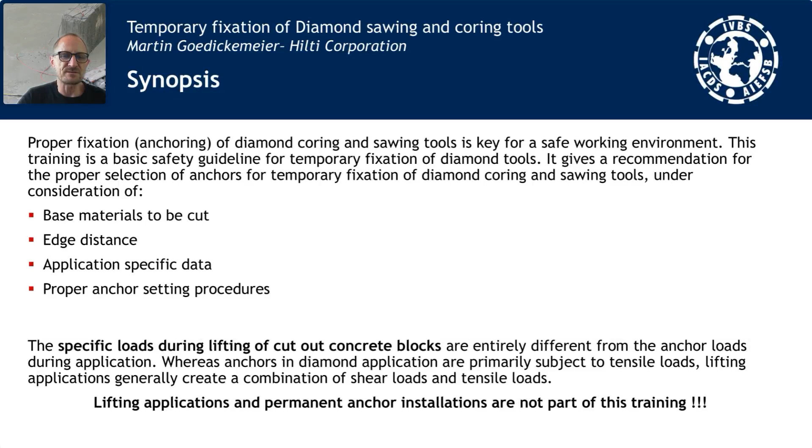Now, when we look into the applications, first of all we have to talk about the surface, the base material we are anchoring to. Usually our knowledge on the base material, on the concrete or whatever we believe it is, is relatively poor. We don't often know about the type, the tensile strength, and the conditions of the concrete, and it varies very, very strongly by the application.

The use of an anchor type which covers a wide range of these concrete types is therefore advised. It makes sense to have something which can be used more universally if already the base material we are facing is poorly defined. When we look into temporary fixation on masonry, lean concrete, or other surface materials which are not exactly concrete, we would of course have to use different anchor types, but we'll touch upon that later.

What is ultimately influencing very much what we do on the anchoring side are the conditions of the inserts. So if the core bit, saw blade, or wire is really blunt, we see that the forces which we have to exert increase significantly. Everybody knows how coring works - when you have to press the handle on the core rig really, really hard, you know that the core bit might be very blunt. The effect is that the forces acting on our equipment when we use blunt blades, wire, or core bits is factors higher, not just some percent - it's really 2 to 3 times higher, and of course we have to consider this as well when we are anchoring. We have to consider how and what quality our material actually is.

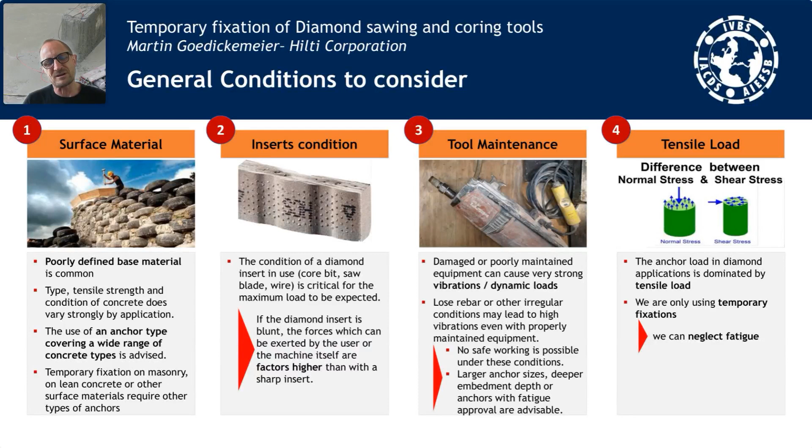The loads we are talking about today are normal loads, so loads which are in the direction of the anchor. When we look into different applications like lifting out blocks, we usually talk about shear stresses, which requires an entirely different look at the whole thing. Today, we are actually happy to be able to cover all the mathematics with normal loads in direction of the anchor, which makes the math - probably already a bit complicated - actually much easier to understand.

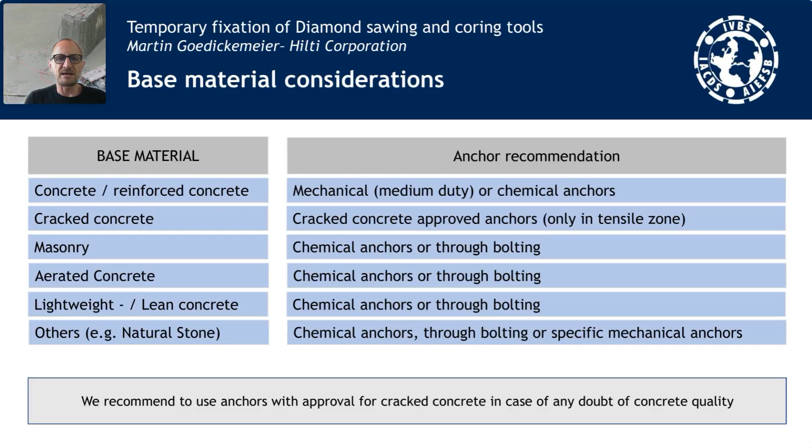Now we look at the base materials, very quickly going through that. For concrete or reinforced concrete, we would use mechanical medium duty or chemical anchors. On cracked concrete, we should use anchors which have approval or resistance for cracked concrete in the tensile zone. On masonry, we would have to use chemical anchors or through bolting. Aerated concrete, lightweight concrete, and natural stone go in the same direction, so there we cannot recommend mechanical anchors - chemical anchors or through bolting have to be used to ensure safe operation of tools.

When we look into cracked concrete, you've probably been asking yourself what that is - you can see it in the picture very nicely. Concrete can only compensate for compressive stresses. When you press on the concrete, that stress is tolerated very nicely. When you pull on the concrete, this does not work. So under tensile loads, which you see in the middle of the hanging beams or above the columns, the concrete will crack. Whether there's rebar or not, concrete will crack in these zones.

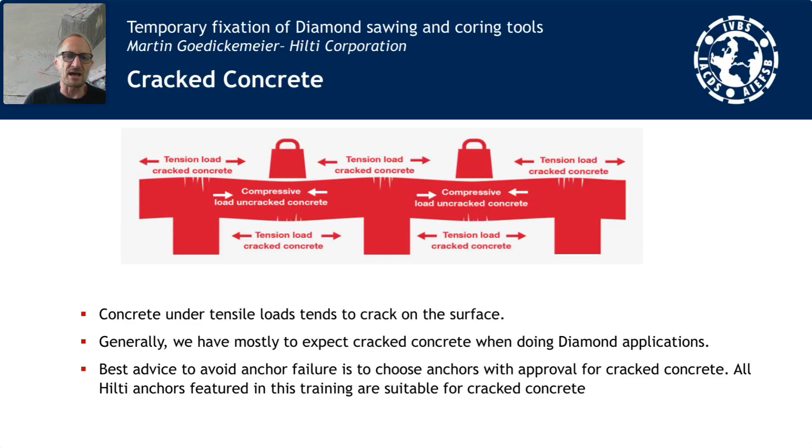And in these zones, we should consider using anchors which can tolerate cracked concrete. The best advice to avoid anchor failures due to concrete conditions is to choose anchors with an approval for cracked concrete, which all of our anchors have. We will show you which anchor types would actually be best for these conditions.

Now, when we look into the mathematics a little bit for the first time, we can do two things. I have put the math behind everything in the third box from the left, but in this presentation I will not go into details - I will just tell you basically three things.

One thing is, the diamond should be sharp. How can you judge it? If you take a core bit, hold it to the light and turn it a little bit, you see the reflection jumping on the diamonds at a given moment - that means the different facets of the diamond are reflecting the light as you turn it. When you have a blunt bit, the reflection changes gradually and you can clearly see the diamonds are round. What is good for us is a sharp core bit, a sharp saw blade, a sharp wire. What is bad for us is a blunt core bit, wire, or blade.

Why is that? When you look at the math, you can see that if the sharpness of the material goes down, the forces we have to exert on the core bit or blades to advance are higher - and not just a little bit higher. They are easily a factor of 2 to 3 higher, and that is clearly reflected entirely on the anchor. So the anchor will be loaded much more with a blunt bit than with a sharp bit. The only recommendation we can give you is: keep your insert sharp. Select the proper specification, select the right gear to saw or core with, and use a good quality machine. We have all experienced that blunt bits need very high pressure, and that can pull your anchor at the moment you really can't have this.

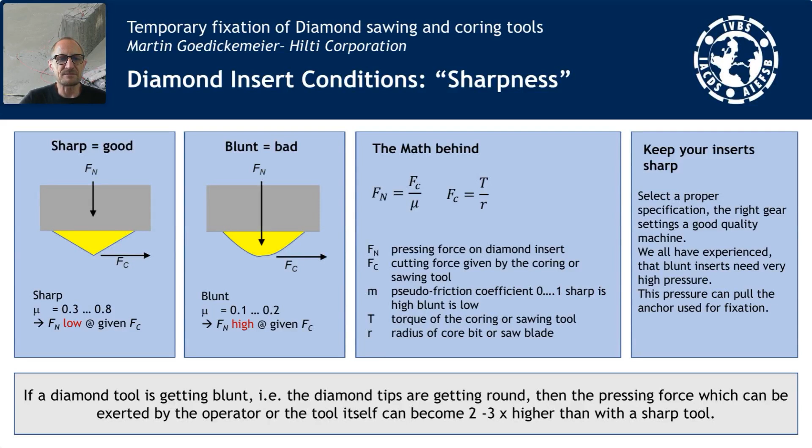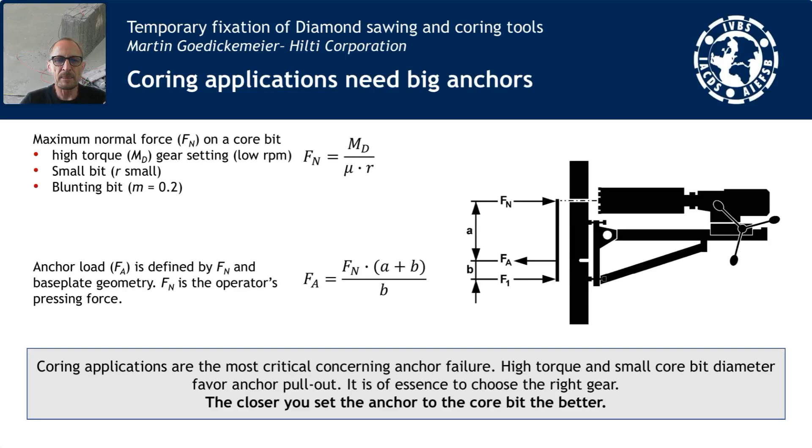Now, one more thing affecting the safety we have is the position of the anchor versus the rig - given by the difference between distances A and B in the picture. If distance B is very short and distance A is very high, then we have an extremely higher load, a lever factor, which pulls on the anchor much more than we believe. So what we should do in any case is put the anchor on a core rig, on a rail support for sawing, and on the pulleys for wire sawing, as close to the insert as possible - as close to the core bit, the saw blade, the wire as we can - because that will limit our pulling forces a lot. How much that can limit our pulling forces, I can show you on the next slides.

This one is clearly an application which is very bad - a very long A to a short B.

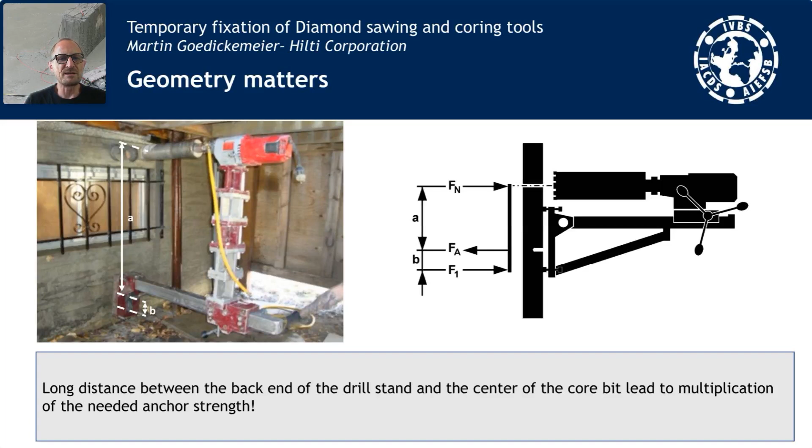Clearly to understand that pulling here on the core rig actually can pull the anchor in a very easy way. Now, when we look at the...

Given a core rig, you can see that if you have an anchor positioned somewhere in the middle of a core rig, now here you have the HD30 from my company, you can see that for small core bits, almost everything is in the red zone. The red zone would actually indicate that the anchor which you mostly use, an M12 anchor or a half-inch anchor, which most of my customers use for coring applications, is actually overloaded. Even if you used correct gear on a 52 millimeter or 2-inch core bit, the anchor is already overloaded.

When we go to a 4-inch or 102 millimeter core bit, you see that if we are operating in the fastest turning gears, we're still okay. But if we choose a gear which is a little bit high, we come immediately into the red zone. And probably for many of us, surprising is that on a 202 millimeter core bit, we almost never can reach the red area. So there, where we believe we could use a small anchor, we cannot. That means on the small core bits, there, where we believe we would have to use a big anchor, on the big core bits, we actually could use a small anchor. So that is very, very important for me that you memorize.

When you have an application with a small anchor, then you cannot use that for small core bits. You can use small anchors only for large core bits, but we clearly do not recommend that. We recommend that for any heavy coring application, like with the DD350 or any tool which is 3 kilowatt and more, you use an anchor which is a size bigger, an M16 or a 5/8 anchor, because those anchors give you the additional safety which you need to have really safe operation. So memorize, small core bits means actually big anchors in any case, whatever tool you use.

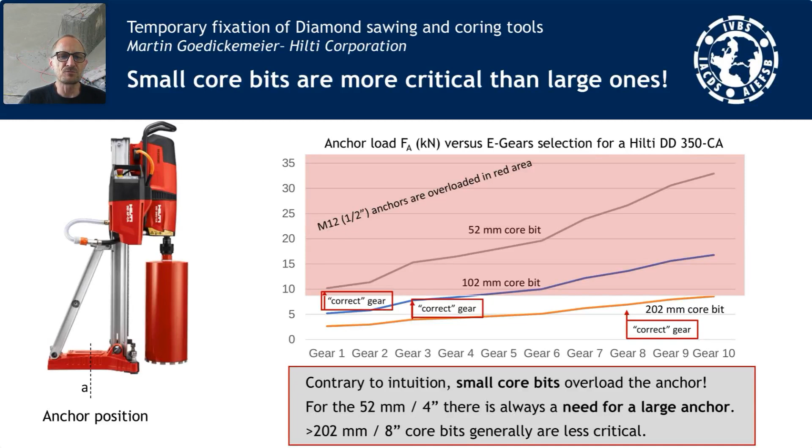When you're using rail support, like for the hydrostress saws, where you're extending downwards and where you have the fixation actually at the wrong side of the blade, then you should actually probably consider taking bigger anchors than you do today to have additional safety.

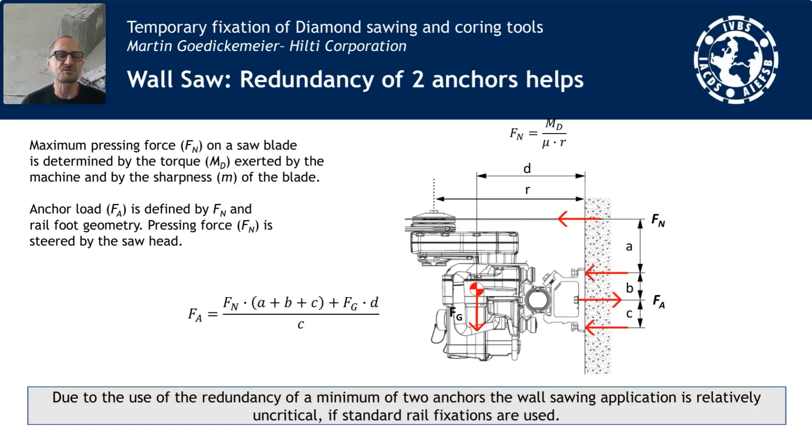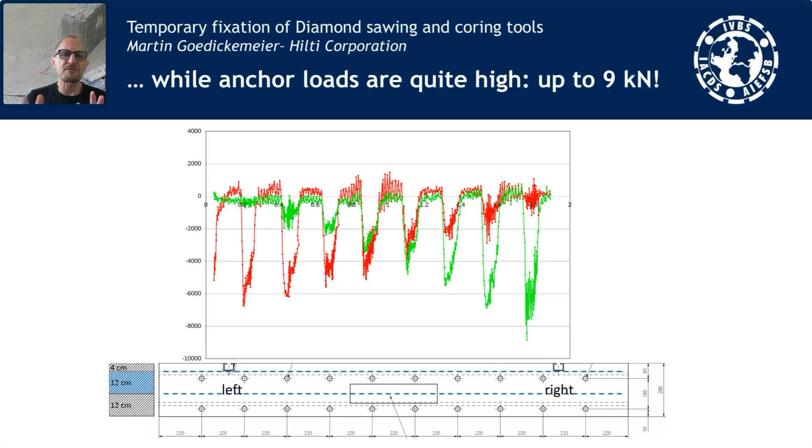When we look at how high the loads are on a sawing application, you see here depicted on the bottom actually a rail with a left fixation point, which is represented by the red loads, and a right fixation point, which is represented by the green loads. And you can see here that the highest load we actually are seeing when we are at the rail support, and the loads are in an order of up to 9 kilonewton, which is exactly what a half-inch anchor still can tolerate. So we are also at a sawing application at the limit, while the good thing is that we have actually 2 anchors in place, which gives us some additional safety and redundancy.

When we look into wire sawing, then we can clearly say that in this application, dynamic forces are governing. The static pulling forces of the wire on the wire is very low. It's only in the order of 1 to 2 kilonewton, so really low forces. But these forces, if something goes wrong, they are actually relieved if the wire ruptures when it blocks, or they are released when the wire doesn't rupture and the concrete block is indeed squeezing the wire. Then they are relieved by anchor breakage.

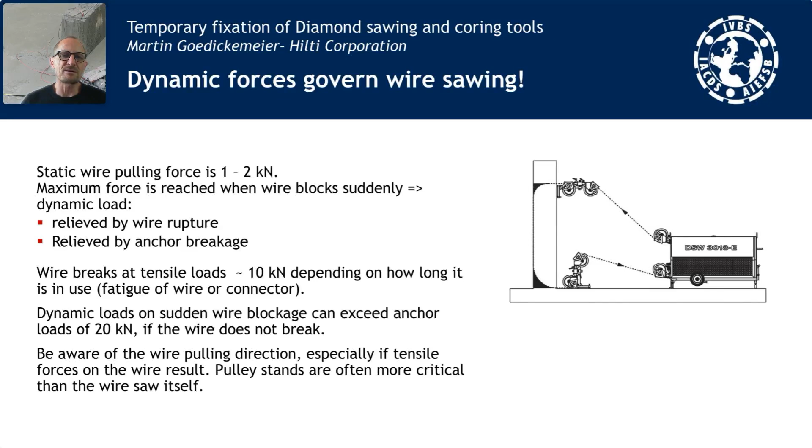We have seen really high forces here, small anchors actually being pulled out and pulleys flying a long distance away. So it's relatively critical when such an anchor comes out, because then the pulley pair can fly away and can hit you. So what we have to expect here are forces which are exceeding clearly 10 kilonewton. So that in that application as well, we actually should be choosing a little bit bigger anchor size to have really safe operation of our equipment.

Now, when we go into the anchor basics, I would like to start with vacuum base plates. Vacuum base plates are not very often used in our industry, but they give you the advantage when you have to work on a nicely polished marble floor where you have to core a hole without additionally setting an anchor.

Sometimes people doing sawing applications under these conditions, refurbishment in perfectly outfitted buildings where you have natural stone or tile floors, can use vacuum base plates, but there are some restrictions.

The vacuum is not as safe as an anchor because it depends on the vacuum pump actually creating proper under-pressure on the plate so that it stays in place. This means overhead applications are restricted because you additionally have to fix the plate. Wall applications also require additional fixation.

We also restrict use without automatic feed. We don't allow customers to use vacuum base plates with automatic feeds on our coring tools because they can exceed the under-pressure and actually lift that plate.

So what I can say here is vacuum base plate fixations are generally more prone to failure due to potential power outages and vacuum leaks caused by irregular concrete surfaces, and there's always additional precaution necessary.

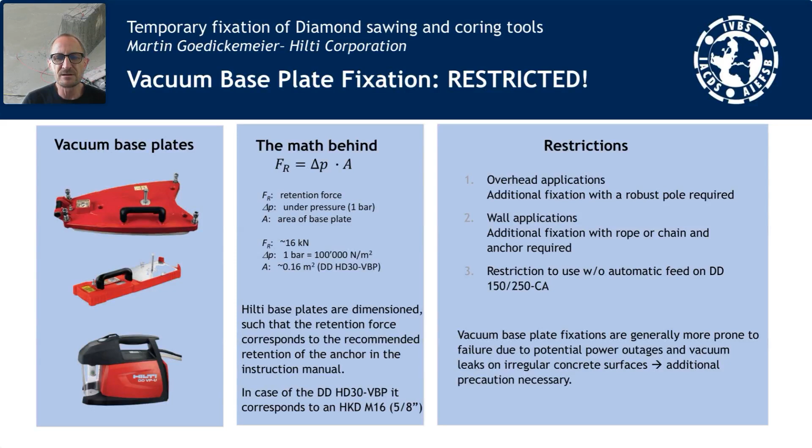While when you look at the math behind it, you don't need a very big surface to create quite a good attachment to the base material to actually have safe operation.

When we look into the other types of anchors, we have basically three working principles. One would be friction anchors, which are all the drop-in anchors you put in and spread by hammering on it with the setting tools. Then you have bonding anchors, which are mostly chemical anchors where you fix them by chemical agents like resins to the concrete.

And there are keying or mechanically interlocking anchors, which produce an undercut when you set them, or concrete screws where you also have interlocking with the concrete. So that's the three principles. What they require in terms of precautions when we set them, I'll touch upon later.

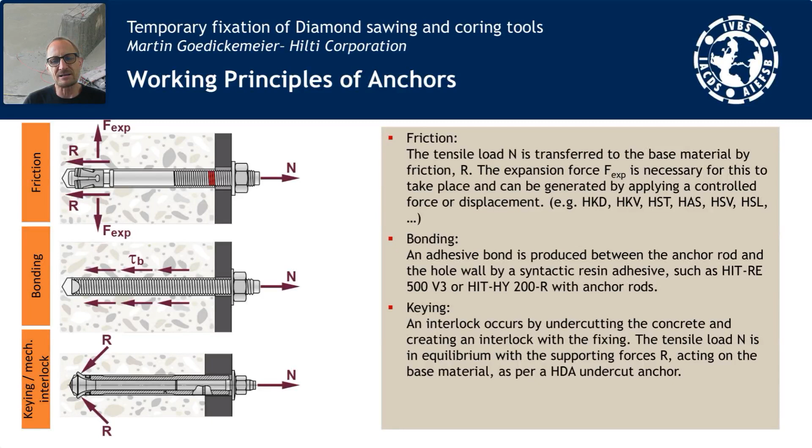So I would recommend that in your companies you look into that fact and make sure all the operators are following proper procedures, because really on the most used anchors, which are the drop-ins, also the anchors I personally like most, it really matters to clean the borehole according to what the manufacturer says, because the holding force of the anchor is a factor of 2 to 3 higher. And we see already when looking at the loads of the application, that the tolerable anchor loads and what the application actually does have, don't have a very high safety margin.

Borehole cleaning is necessary for friction anchors where it's kind of obvious, right? Because if you have something like wet dough on a table, it will always stick, but if you put flour below, it will always move on the table. So that effect is clear to everybody.

On the bonding anchors, the same thing: if you're bonding to dust, your anchor might not hold very well. On the keying and interlocking anchors it's not so clear, but you can imagine that if you have dust in the hole, the spreading of the anchor in front is actually limited.

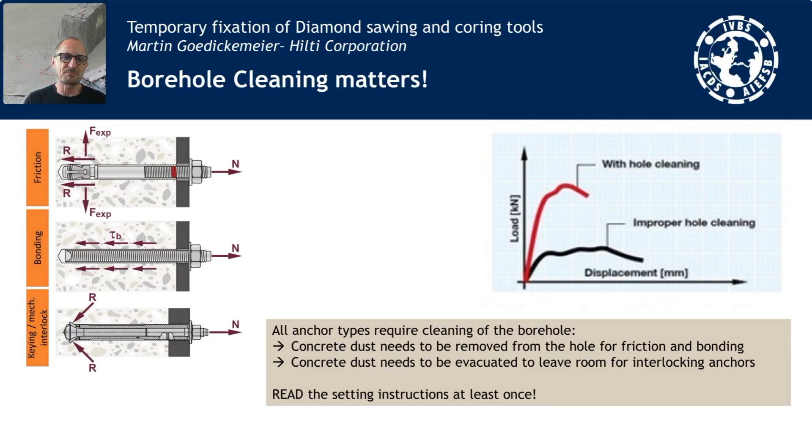Or when you have dust left when you put in a concrete screw, it just cannot compress that concrete dust sufficiently. On concrete screws, therefore, it would actually be enough to drill a deeper hole where all the dirt can go. But on the other two anchor types, proper cleaning of the hole is of absolute essence.

A little word on safety factors.

Characteristic action is the load applied under standard conditions, meaning the correct choice of gear for the core, favorable geometry of the equipment, good setting of the anchor. Everything else, like unfavorable geometry or wrong gears, increases the load and requires reconsideration of anchor size and type.

Then we have things which really limit the efficiency of an anchor, such as environmental conditions, temperature, durability, and concrete conditions, which define the characteristic resistance, so what typically an anchor would hold.

Then come the safety factors in place, which we all need for the design resistance, so that an engineer can design an anchor for eternal use, meaning in our case 50 years of loading in concrete. Below that, we have the recommended load, typically used to specify an anchor for durable fixation.

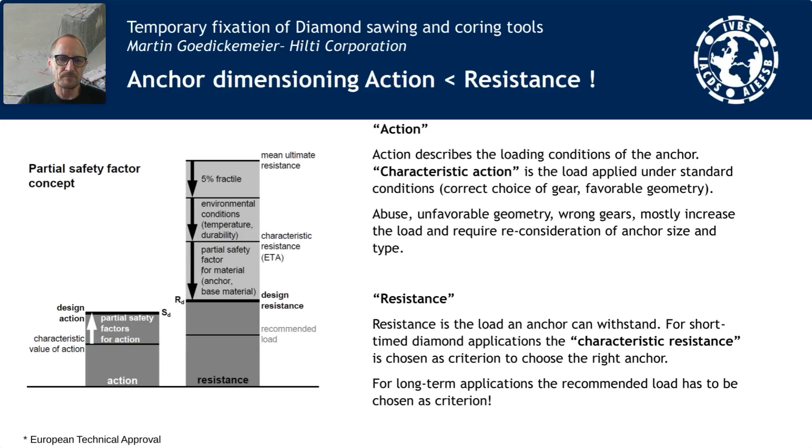You see it here again: when we look at the characteristic load of a drop-in anchor, it's very small. In the presentation later on, you'll see that an M12 HKD has a characteristic resistance of 9 kilonewton, and the M16 of 16 kilonewton.

These are the values we've seen exceeded in coring applications, and actually already reached in sawing applications. If you go to the lowest table here, you see the recommended loads, and these are much lower than the load we actually apply for diamond applications.

Clearly, these are the loads you have to calculate with if you want to have safety factors included, and if you want long-term rather than temporary fixation of an anchor in a building, for example.

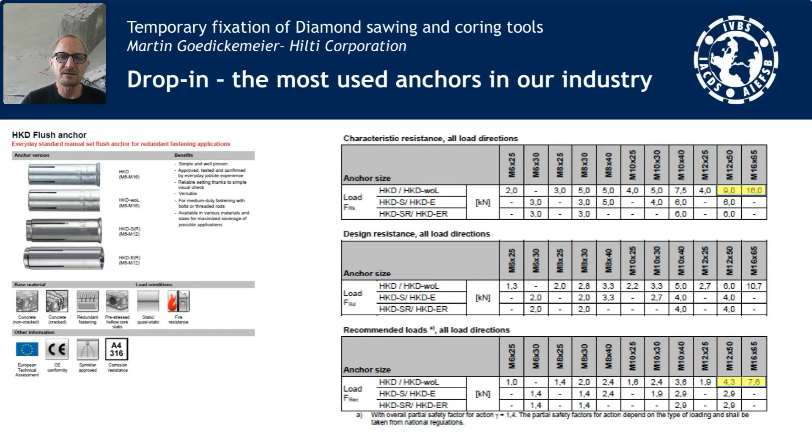Now there's a second thing we need to consider, and probably all of us have experienced it when setting an anchor close to the edge. It might lead to spalling, or the anchor just comes out again, or issues arise if we're setting anchors close to each other.

This is why, for example, we cannot use drop-in anchors that are spread by a hammer for fixing a console, because setting the anchors as close together as the console allows would actually damage the concrete and not give us additional safety from having 3 or 4 anchors, but lower safety because they're close to each other. The edge distance on the x-axis is relatively high for drop-in anchors.

It's 17 centimeters for an M12, and 23 centimeters for an M16. In practical terms, this means we have to look at edge distances or distances between anchors of one hand wide for an M12 and two hands wide for an M16.

Then we have all the other anchors - concrete screws, chemical anchors, and stud anchors - where we can have much closer edge distance. A concrete screw can go up to 50 millimeters from the edge, which typically requires, say, 12 times the diameter of the anchor. So we can go much closer to the edge with those kinds of anchors.

If you have to do something, for example, on stairs where the distance is limited by the width of the stair - we normally choose how far to go from the edge - we probably have to use concrete screws or chemical anchors to fix our equipment, and have to leave the HKD or drop-in anchors we're using at home for that day.

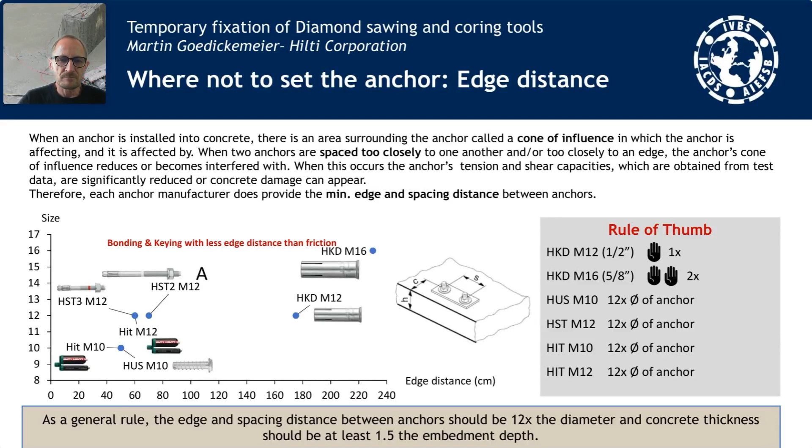For the setting procedures, there's one thing I want to share with you. When I'm doing training with newbies in our company, they're typically account managers who've been in building construction for quite some years, and they come into our trade dealing with heavy diamond and diamond contractors. We make them set anchors, and we are amazed how little knowledge they have on setting anchors. So the first part of any training we do is making sure they can set anchors.

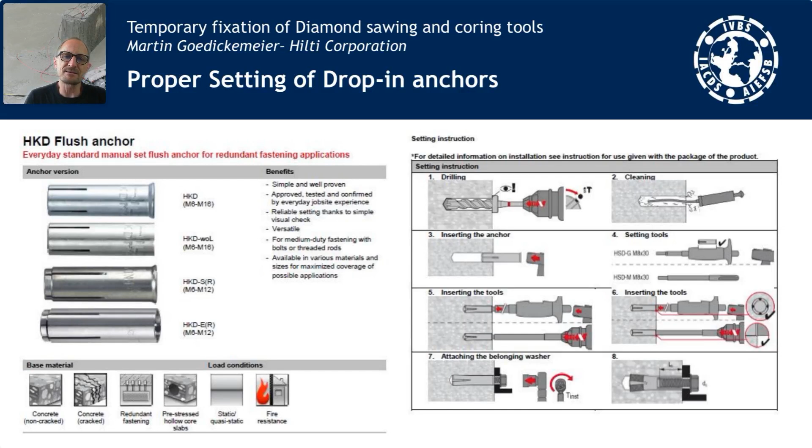You probably should give it consideration when you look at your operators, to make sure this is properly done. Because if you don't properly set an anchor for coring or sawing applications - and setting means drilling the hole deep enough and blowing out the hole - your safety margins get really, really small for the application. So anchor setting and cleaning is a very important part of the whole thing.

When we look at concrete failure, we talk about how a failure looks if the setting has been okay. If the anchor is just pulled out, as you can see when setting a drop-in anchor without proper hole cleaning, that can be seen by anybody looking at it - the anchor was not set right. If something goes wrong and something is damaged, the picture might show a concrete breakout where a big cone is hanging on the anchor, an anchor pullaway where something is hanging on the anchor, a shear rupture of the anchor steel, or a tensile failure of the anchor.

These are all anchor failures which you will never see in your applications. If something happens, in most cases you'll see just a proper pull out of the anchor where the concrete is undamaged and the anchor alone, naked, comes out. That was an application failure. Failures of the anchor otherwise look very different, with the last one being edge breakage, which already happens when you set the anchor, not only when you load it. But that's covered by getting proper edge distance.

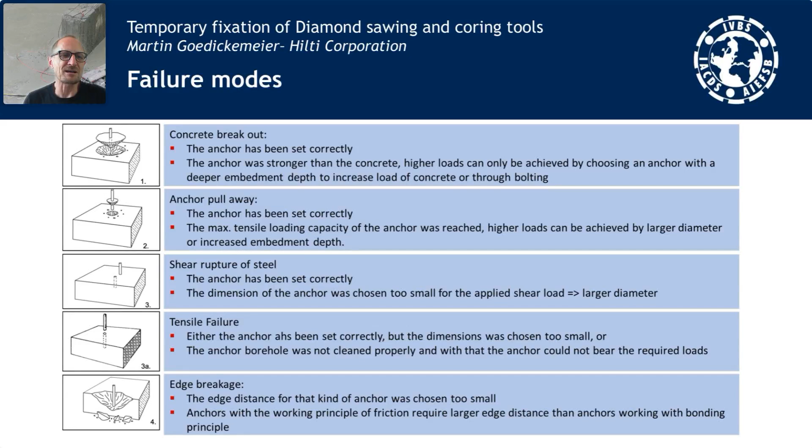So failure modes can, post-mortem, always be assessed to determine if it was a setting failure or an anchor failure. And all the failures I've seen in applications where rails or tools came off the wall were operator failures. So that is something I would put close to your heart, to make sure this is done properly.

Now the recommendations for what to use on coring and sawing are very short to mention. On a coring tool with less than 2.5 kilowatts, we would recommend using an HKD M12x50 anchor, so a half-inch drop-in. On coring tools with more than 2.5 kilowatts, we clearly recommend using an M16 or 5/8 anchor in all these applications.

On applications in masonry, aerated concrete, lean concrete, or natural stone, we would actually recommend HIT MM Plus or HIT HY100 anchors to be set.

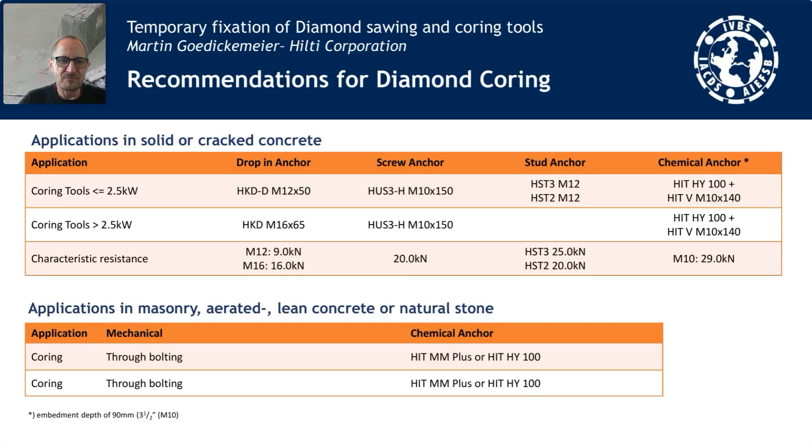When we go into sawing applications - just a second, I see a mistake here in that slide - so we would recommend, for DD tools with less than 2.5 kilowatts: on wall sawing applications, an M12x50 anchor, and on wire sawing applications, an HKD M16 anchor in order to be safe. For both applications, through bolting or HIT MM Plus or HIT HY100 for use in masonry, aerated concrete, lean concrete, or natural stone.

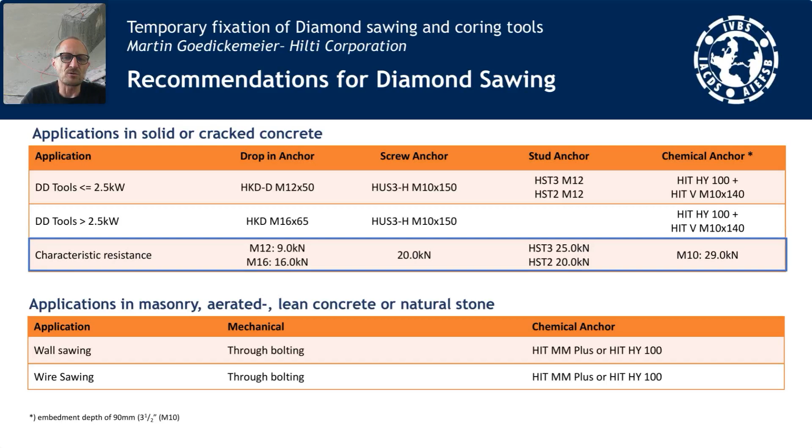Now, as a summary: the safety factors for temporary fixations are minimal, and the choice of a good quality anchor is advised in combination with proper setting procedure. The anchor needs to be able to handle cracked concrete, which is very advisable because you don't know the conditions of the concrete you're coring.

In coring and wire sawing applications, we face one anchor taking the load, so we have no redundancy. Generally, it's advised to use M16 or 5/8-inch drop-in anchors - remember, larger diameters make for higher loads. On wall sawing applications, we're generally less critical due to two anchors with some redundancy. Here we recommend M12 or 1/2-inch drop-in anchors.

And what we can clearly say, we recommend that you actually do some tasks in your companies, and that would be writing anchoring guidelines for your operators and provide and document operator training. I'm sure our local guys would actually help you doing that. And I believe this makes you safer in operation and makes you more professional in the way you go about your work. With that, I'm closing actually quite on time that presentation, and I think we are now open for questions.